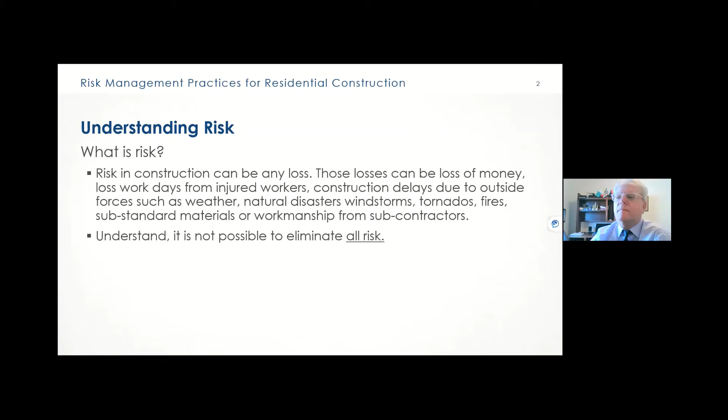So with risk comes reward. Obviously, the bigger the risk, the greater the reward. With that said, the construction manager or construction company owners must be able to understand the risk of a project in order to determine if the risk is worth the reward.

Generally, in the construction industry, in residential construction, usually the risks are a little bit less complicated than it would be like in a large commercial construction project where you have multiple floors that are being built, or you may be building on a substandard soil surface that you have to take into consideration for compaction to make sure the building doesn't settle or tilt or something of that nature. So, you know, residential construction is a little bit less complicated.

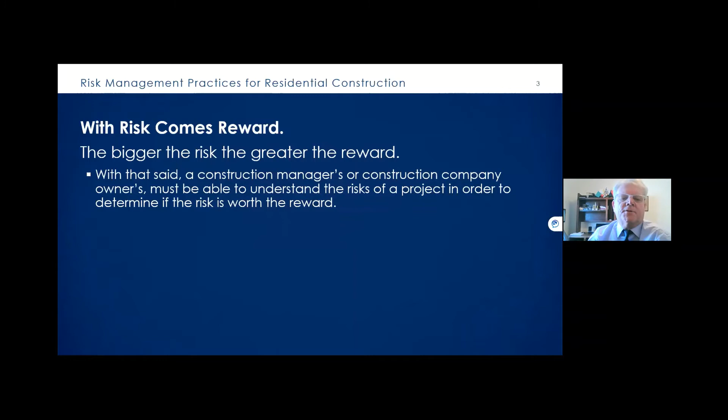The first one is identification. Obviously, you have to identify your risks in order to be able to take measures to prevent a loss. In doing so, you have to do an assessment of the risks to determine what the degree of the risk exposure is and whether or not it needs to be prioritized to be a high priority or a less priority risk to take into consideration.

You have to implement controls, which is what I do for a living. That's why they call us loss control. Those are various things like administrative controls. It could be, you know, safety equipment on a job site as a control. And these are things that we discuss with our insureds when we're on job sites talking about preventing losses on their construction sites. You certainly have to have a review process to determine whether or not the controls and your assessment have been accurate and working properly.

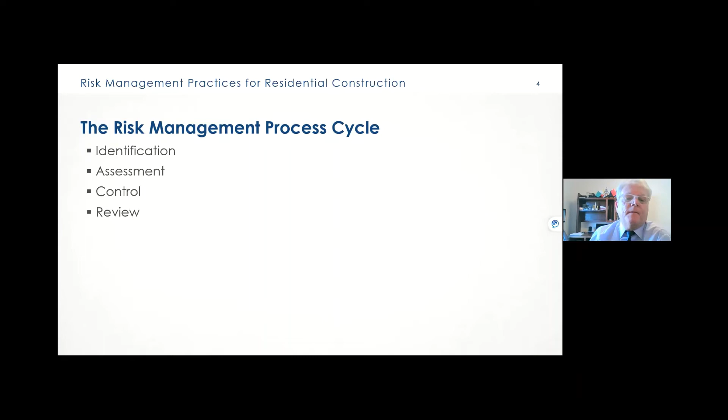And we'll get into each of these, identification first. So what are your risks? Well, as mentioned, it can be many things, such as weather. Obviously, you that are in the construction business know that weather always plays a significant factor in how your job sites progress. So we have to plan for weather events various times of the year, obviously. Certainly, if you're in the framing contracting business, wind is your enemy, and you have to make sure that you put the proper bracing in your framing so it doesn't get blown down during the process. We have a lot of losses associated with wind as well as fire, which is another big hazard associated with buildings that are under construction, especially those that are frame construction made out of wood.

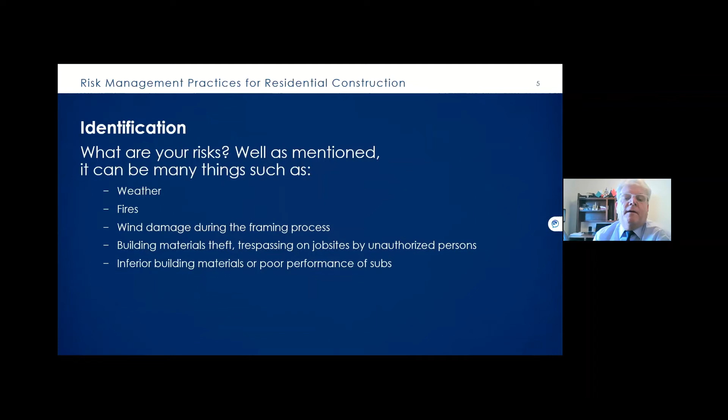Obviously, building materials. Theft is also an exposure that contractors have to be aware of. Trespassing on job sites by unauthorized persons. Certainly inferior building materials or poor performance of subs have to be identified, hopefully early on before it becomes a major problem after a structure has been built. So that is something that the general contractor or the home builder has to be aware of and monitor.

Other examples of things that in the identification process would be worker accidents resulting in serious injury or death. Certainly you need to have the proper safety measures in place and training of your employees and subcontractors that you use on your job sites.

There are regulatory exposures on jobs from the authority having jurisdiction of your building projects that you have to identify and be aware of, that you have to take into consideration. Certainly Occupational Safety and Health Administration enforcement actions resulting in expensive fines. So those are all things that have to be identified and controlled.

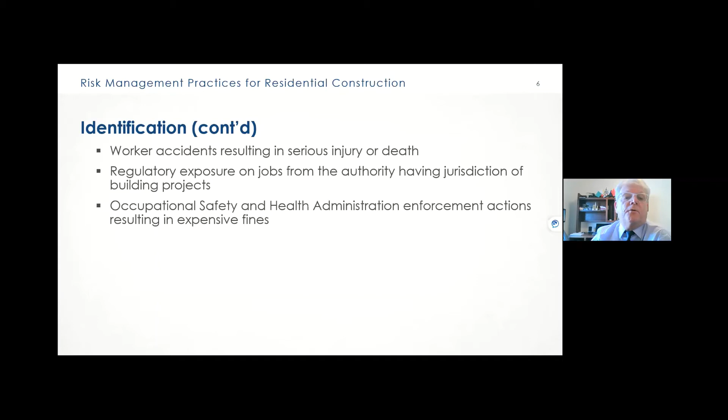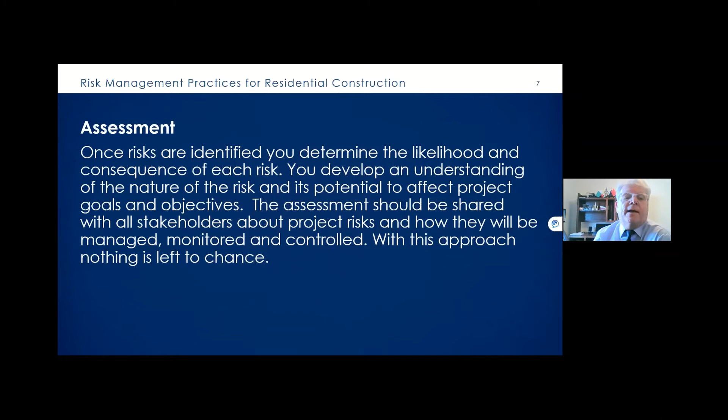During the assessment phase, once risks are identified, you determine the likelihood and consequences of each risk. You develop an understanding of the nature of the risk and its potential to affect project goals and objectives. The assessment should be shared with all stakeholders about the project risks and how they will be managed, monitored, and controlled. With this approach, you try to leave nothing left to chance.

So in the control phase of a risk management assessment or cycle, what is the impact a potential risk occurrence will have to the project, and how much will it impact your reward? Controls can be many measures taken following the assessment process to reduce the impact or eliminate the risk entirely.

Examples: implementing a subcontractor qualification process to ensure your subcontractors meet your high standards. Hiring subcontractors that have experience in the tasks that need to be performed to construct the dwelling in a safe and cost-effective manner.

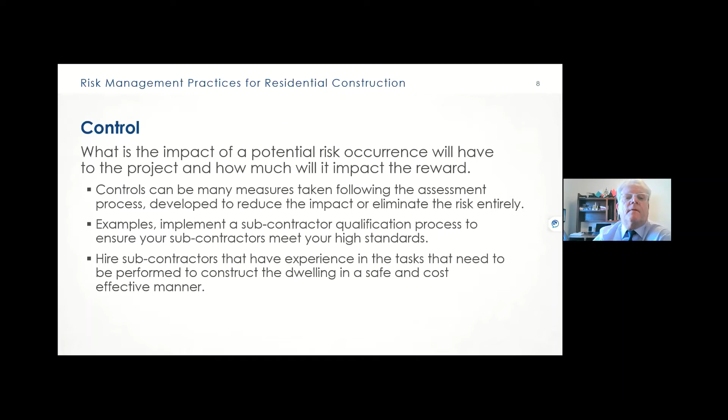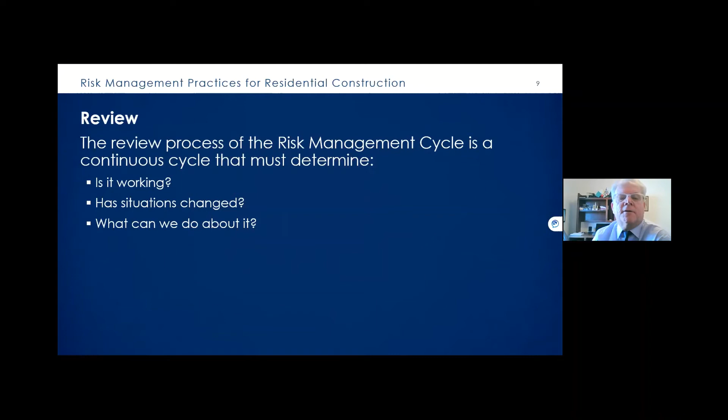During the review process of the risk management cycle, this is a continuous cycle that must be determined. You have to review and see if your controls are working. Has any situation on the job site project changed? And if so, what can we do about it? So there has to be a continuous review of your risk management cycle during a project to identify any issues that come up during a construction phase of your building.

Transfer of risk, you hear that often in the insurance industry. We have all seen construction risk transfer agreements that are asked to be signed by general contractors directed to their subs, to hold them harmless in the event of any and all claims associated with their part of the project. Now, there is a news flash, and nobody likes to have to sign these agreements, especially subcontractors, which are asked to be signed before any work begins. But don't get me wrong, they have their place as a risk management technique in transferring risk and liability.

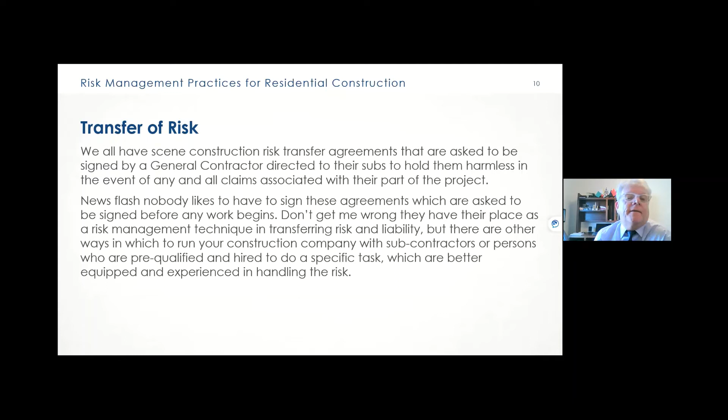But there are other ways in which to run a construction company, with subcontractors and persons who are pre-qualified and hired to do a specific task, which are better equipped and experienced in handling the risk. So that's where pre-qualification can come into play and be very effective in vetting your subcontractors to make sure they do have good safety programs, their employees are well trained, they're financially stable, and are meeting your high standards before you hire them to do a particular task on your project or building.

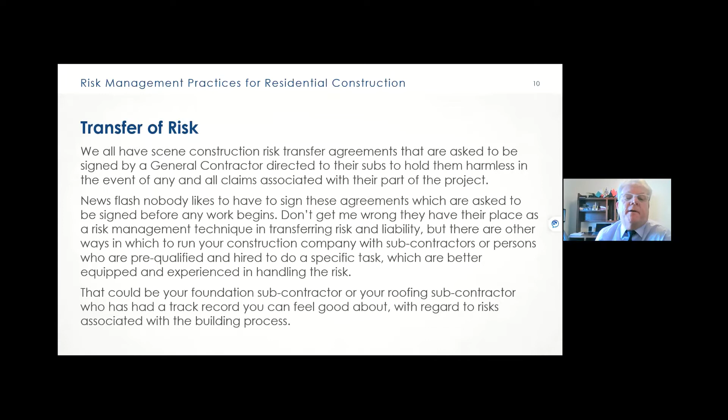That could be your foundation contractor, your roofing subcontractor, who has had a track record you can feel good about with regards to risks associated with their building process. One thing in risk management is document control, especially on complex projects.

Document control is a backbone in construction management, including construction risk management. You need to have a documentation system that will effectively improve workflow, ensure you're delivering your projects on time, and with the least amount of risk and loss.

Today, the technology must be leveraged to improve document control and control risk. This can be done with software systems that allow every stakeholder to have access to input data and documents that are critical to the flow of the project. With the reduction of the paperwork burden, you will have more time free to spend on job sites to conduct quality, productivity, and safety audits, and work on your higher level tasks to mitigate risks.

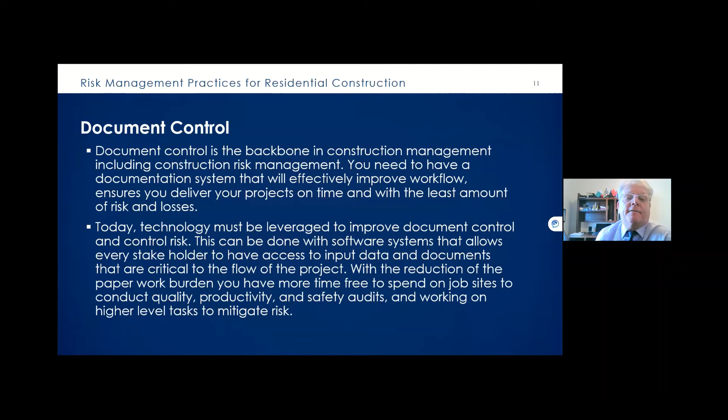One thing that we do as loss control consultants is we're very much interested in job site security, especially if we're insuring the contractor, or if we're actually underwriting the entire building project. So we take a look at job site security.

Sometimes old school is the best way to protect a job site from thieves and trespassers, in combination with new technology.

One way of doing that is putting up a fence around your job sites if feasible. Now, I know that a lot of residential construction, you don't see fencing. In my career, I have seen some home builders that do put up fencing around their projects, especially if it's in a subdivision that has people living in it. There may be children in the area, so putting up a job site security fence is a good way of keeping trespassers from coming into your job site.

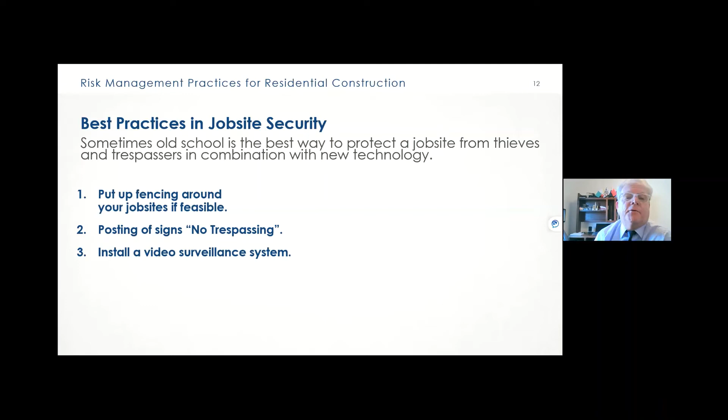Posting signs for no trespassing, installing video surveillance systems. Today there are wireless cameras that can be placed inside buildings under construction, that can be tied to a cell phone so you can monitor a job site. There are motion detectors with these surveillance systems, so if somebody walks into a job site or a building under residential construction, that would set off an alarm, sending you a message that you've got a trespasser on your job site.

The use of GPS tracking devices for equipment. We have a lot of equipment theft with construction sites. Building materials are also stolen off job sites and have high value.

Another thing that is very important is to schedule material and equipment deliveries and pickup of equipment carefully. You don't want to have material sitting on a job site for too lengthy a period of time, allowing thieves to come on site and steal that material. A lot of contractors will rent equipment, and that equipment is usually delivered by the rental company. Sometimes the rental company is not very good about picking up their equipment in a timely fashion, and it can be left on a job site for a lengthy period of time, allowing thieves to come in and steal the equipment. So it's very important to make sure that you've got a delivery schedule.

Again, as quickly as possible during the construction phase, the framing phase of a residential home, you want to try to button up that home as best you can, maybe with plywood. You want to put maybe some 2x4s over the windows to prevent trespassers from entering the building, those kind of things.

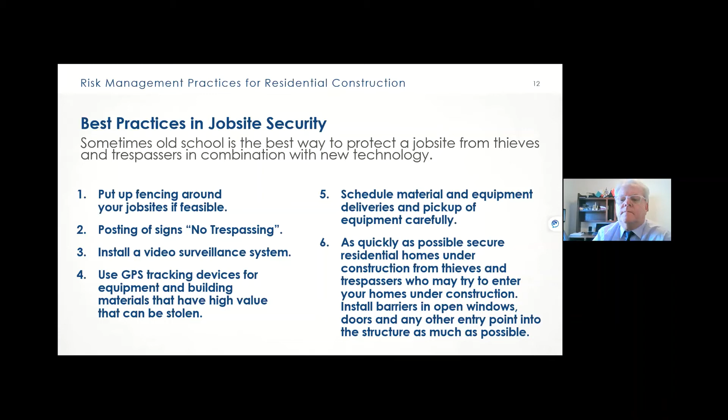I mentioned earlier about pre-qualification for subcontractors. For a building owner, construction company, general contractor, or a homeowner construction company, you need to have a good pre-qualification program for your subcontractors. What specifically has your program accomplished? What factors should you consider in managing your pre-qualification programs?

Most residential home builders specify expertise for the tasks that they are hiring subcontractors for, whether it be a framing contractor, foundation, electrical, or roofing contractor. They need to take a look at their safety programs. Do they have a good track record as far as accidents are concerned? There are a lot of factors that you can take a look at in doing a pre-qualification of your subcontractors.

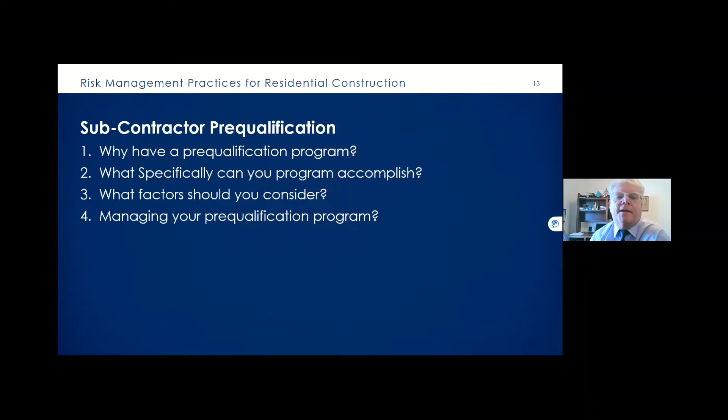One thing that I wanted to cover today in my presentation is fall protection. This is a standard that often gets abused, and contractors don't always follow the letter of the law as far as fall protection is concerned.

Fall protection is covered under 1926-501. The agency's interpretation of residential construction for purposes of the 1926-501 standard combines two elements, both of which must be satisfied for a project to fall under that provision. The end use of the structure being built must be a home, a dwelling, and the structure being built must be constructed using traditional wood frame construction materials and methods. The limited use of structural steel in a predominantly wood framed home, such as a steel I-beam to help support wood framing, does not disqualify the structure from being considered residential construction.

Traditional wood frame construction materials and methods will be characterized by the following: framing materials of wood or equivalent cold form sheet metal stud framing, not steel or concrete, with wooden floor joists and roof structures; exterior wall structures such as wood or equivalent cold form sheet metal stud framing, or masonry, brick, or block. For methods, traditional wood frame construction techniques must be employed.

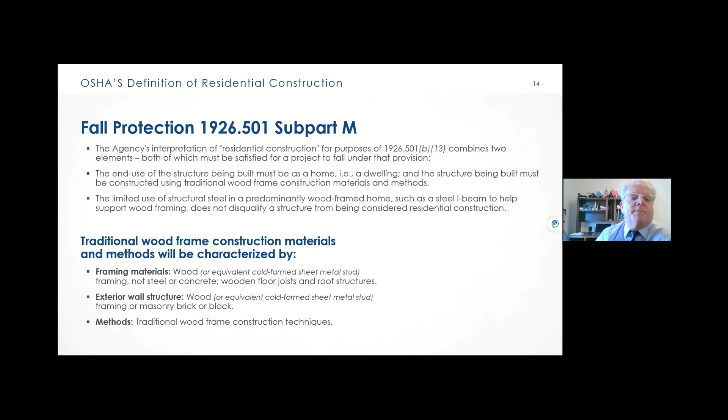So the residential construction fall protection requirements: employees working 6 feet or more above lower levels must be protected by conventional fall protection methods, such as guardrail systems, safety nets, or a personal fall arrest system, commonly called a PFAS system, or an alternative fall protection measure allowed by the provisions of 1926-501 for particular types of work.

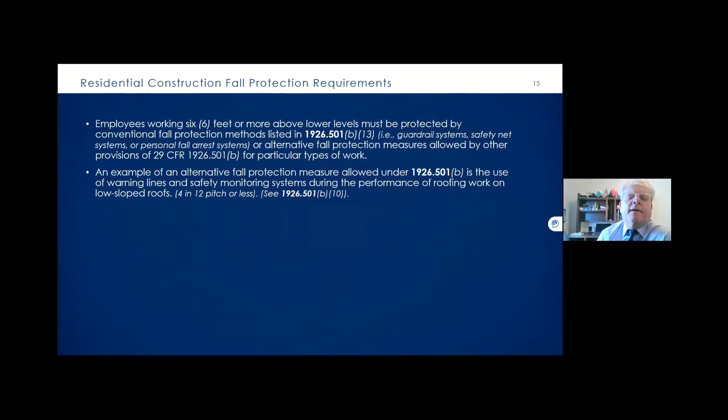An example of an alternative fall protection measure allowed under 1926-501 is the use of warning lines and safety monitoring systems during the performance of roofing work on low slope roofs. Commonly you will see ropes with flags on the top of a roof, indicating a leading edge. So the workers have to stay inside that rope line and cannot get on the other side of that rope line without having proper fall protection on.

OSHA allows the use of an effective fall restraint system in lieu of a personal fall arrest system. To be effective, a fall restraint system must be rigged to prevent a worker from reaching a fall hazard and falling over the edge. A fall restraint system may consist of a full body harness connected to an anchor point at the center of a roof by a lanyard of a length that will not allow a worker to physically reach the edge of the roof.

There's a lot of different devices out there today. We've come a long way in fall protection over the years. There are various ways of putting in anchorage points in residential buildings as they're being constructed. I've seen them use nylon connection devices that are actually nailed into the eaves of a house as it's being built, allowing the roofers to be able to attach their lanyards. That's one method.

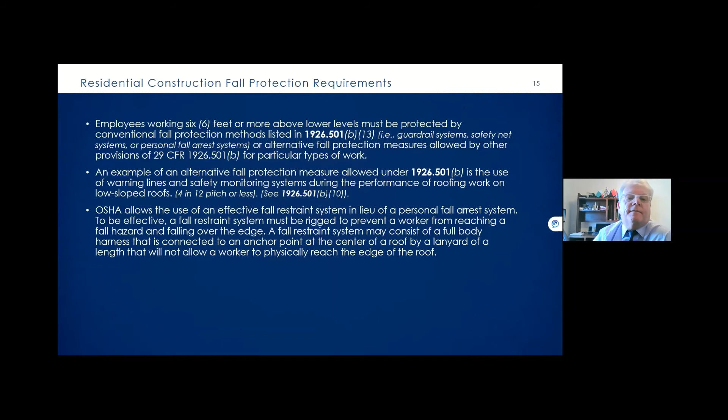When the employer can demonstrate that it is infeasible or creates a greater hazard to use a required fall protection system, a qualified person must develop a written site-specific fall protection plan in accordance with 1926-502K. That, among other things, specifies the alternative fall protection methods that will be used to protect workers from falls.

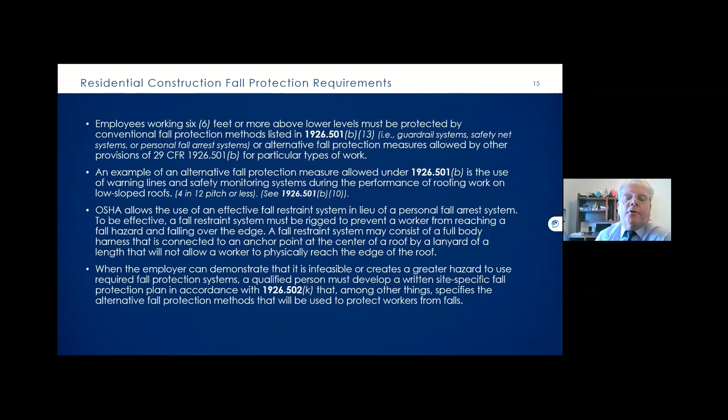Employers must follow 1926-501, which states that workers engaged in residential construction, as I said earlier, 6 feet or more above lower levels shall be protected by a guardrail system, safety net system, or a personal fall arrest system, or by an alternative fall protection measure allowed under 1926-501 for a particular type of work that's being done.

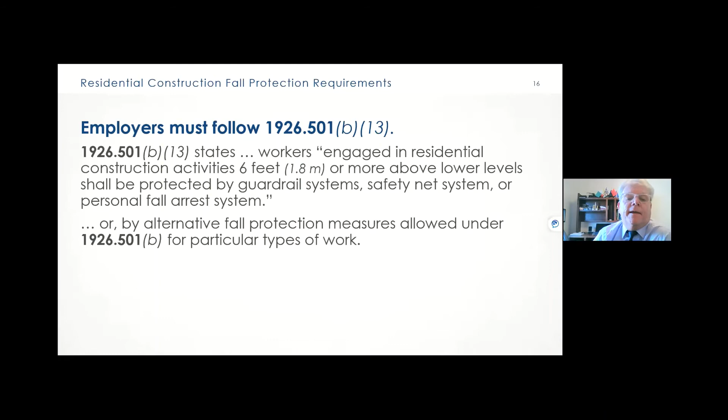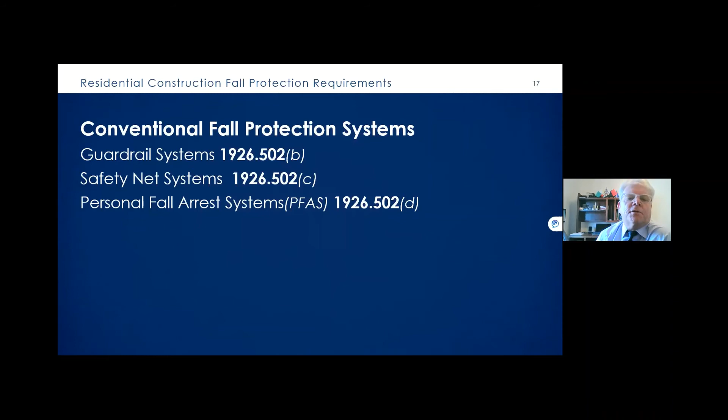Conventional fall protection systems often employed during construction of residential buildings are guardrail systems, and sometimes safety net systems—though you don't see too much of safety net systems used on residential. I think you would probably see that more in a high-rise situation than in residential construction. Personal fall arrest systems, that would be your body harness and lanyards attached to an anchorage point, are often used on residential building construction.

The requirements for guardrail systems include top rails 42 inches plus or minus 3 inches. The top rail must withstand 200 pounds of force—that's basically an average man's weight for that top rail. Mid rails, halfway up, have to have 150 pounds of strength, along with the surface of the guardrail must be smooth or covered to prevent lacerations or snagging of clothing. You're not allowed to use any kind of steel or plastic banding according to the standard.

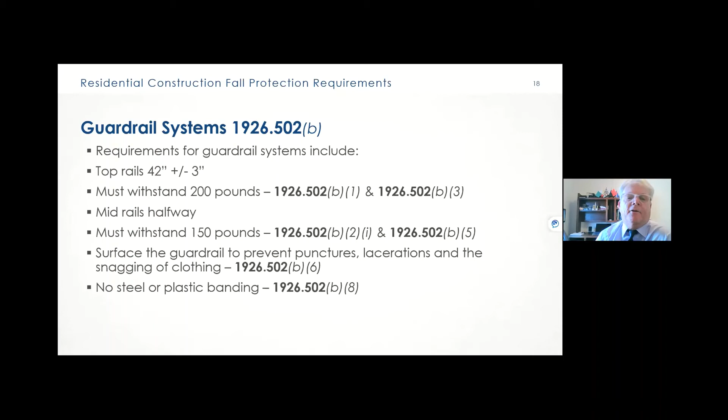Safety net system requirements: as close as practicable, no more than 30 feet below, meaning you can't fall any farther than 30 feet—that's the top amount allowed under the standard. Sufficient clearance to prevent contact with surfaces or structures below, and the net has to be drop tested or certified for a fall arrest system.

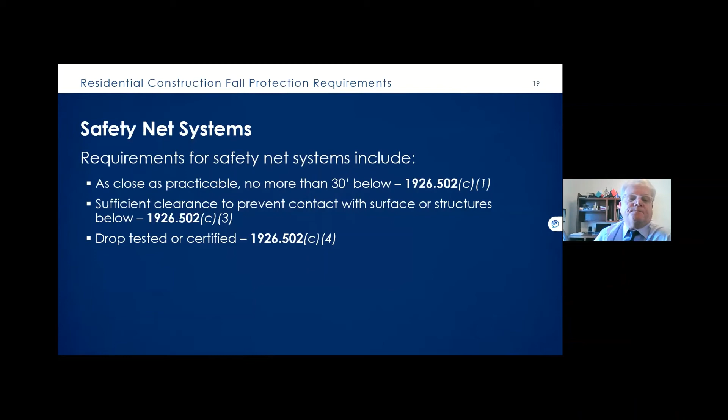A PFAS must include the following: anchorage point, body harness, connector lanyard. A PFAS must also include a lanyard and a deceleration device or lifeline. For those of you that don't know what a deceleration device is, it's basically a clutch system in line with the lifeline that allows a person to fall a few feet before the clutch engages and stops the fall from happening while it's in progress.

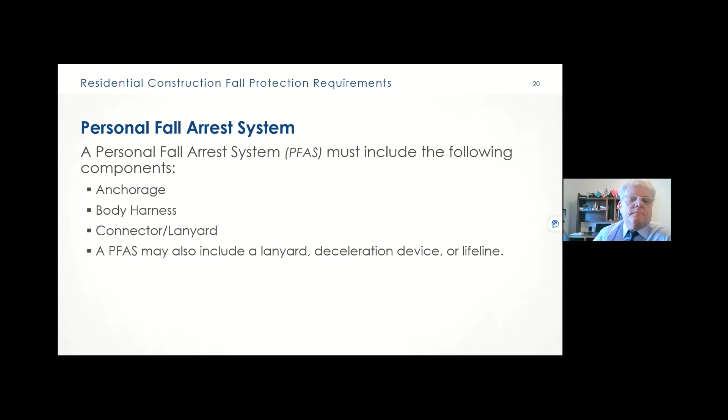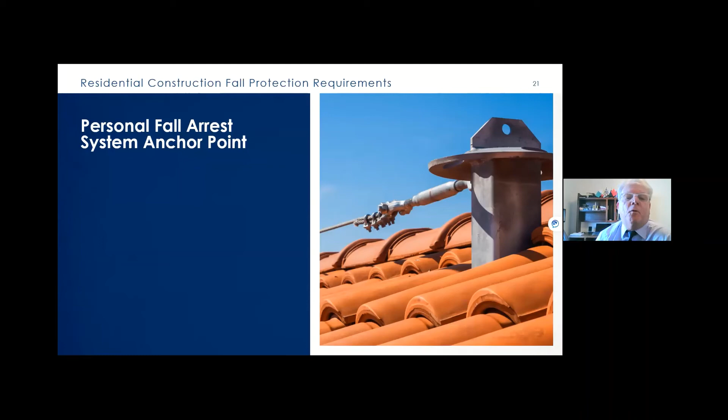Anchorage used for attachment is critical to the success of your fall protection system. It has to have 5,000 pounds of strength to it, which sounds like a lot—which it is—to be used for an anchorage point. There needs to be a competent person qualified on the job site that understands how to properly install these anchorage points, following the employer's and manufacturer's instructions and recommendations, or a registered professional engineer, for proper installation.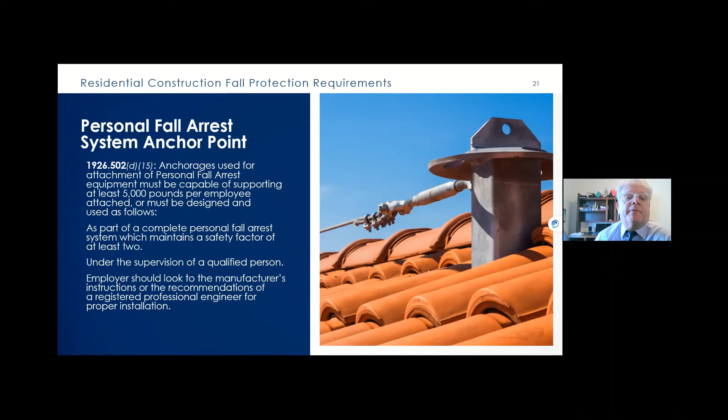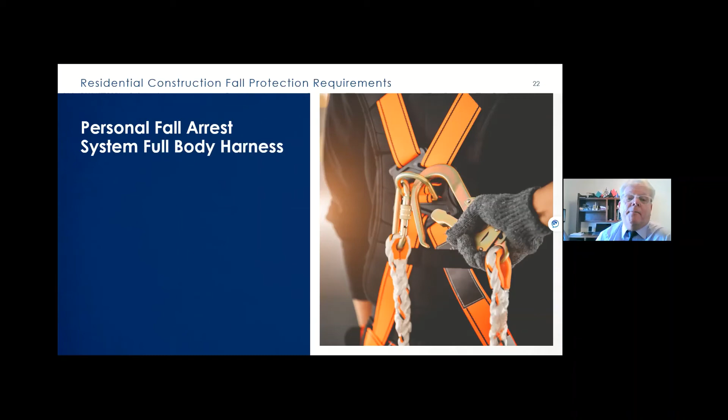Hey Jim, when you're looking at loss control for falls, I was talking to an assistant fire chief, and he said they get called most of the time because of falls. What would you say is the biggest violation you see when doing loss control on a job, something they could have done differently to prevent that fall? What's the most common thing you see?

Well, funny you mention that. I've got some examples here in my presentation, but I'd say a lot of times it's lack of installing railing, especially on second floor levels, and during the framing process, open floor holes for stairwells in residential or multi-floor buildings under construction. There's no railing around that to prevent a worker from backing off and falling to the level below. That's probably the most common thing I see. Or you just see blatant total non-use of any fall protection on some job sites. Unfortunately, there are still contractors out there who think they can build residential buildings without fall protection measures. So it runs the gamut.

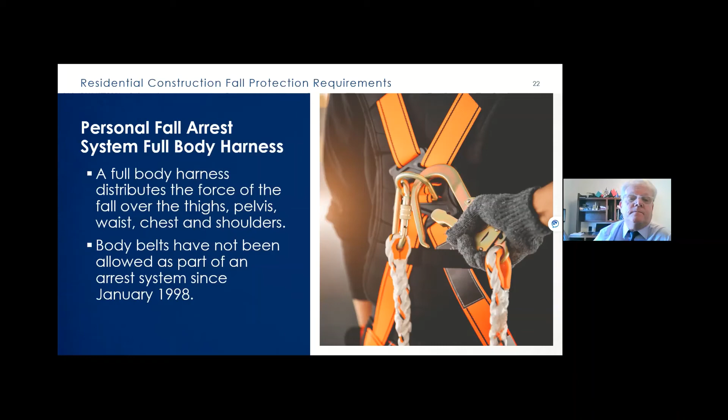I think you have a device where you can raise your hand. I want to see how many people think this is a fall hazard. There's a little button there, you can raise your hand.

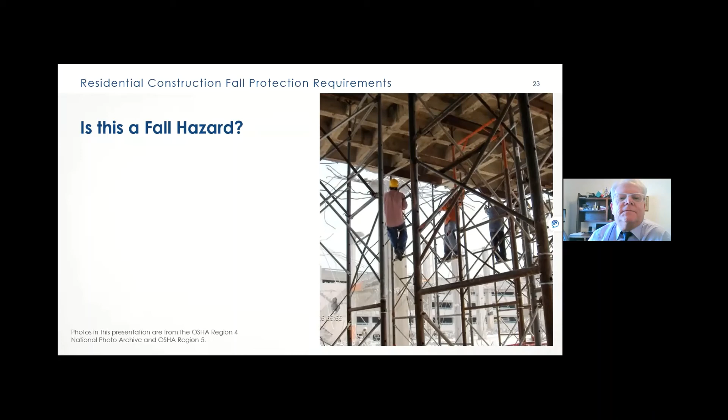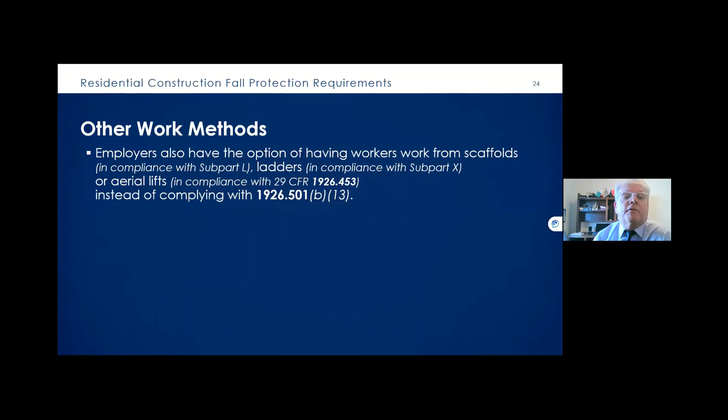As I mentioned earlier, employers also have the option of having workers work from scaffolds, ladders, or aerial lifts. All of these are considered alternative work methods. But the answer to this scenario is yes, this is a fall hazard. You've got a guy setting up a scaffold with no fall protection on. The standard says you have to use ladders or aerial lifts to erect scaffolding safely in order to be in compliance with the 1926.501 fall protection standard. Workers can fall from climbing on a shoring structure to set it up and remove it. As I said, ladders and lifts must be provided.

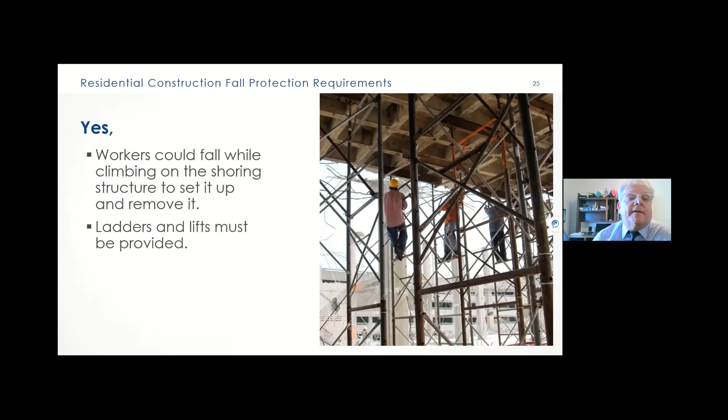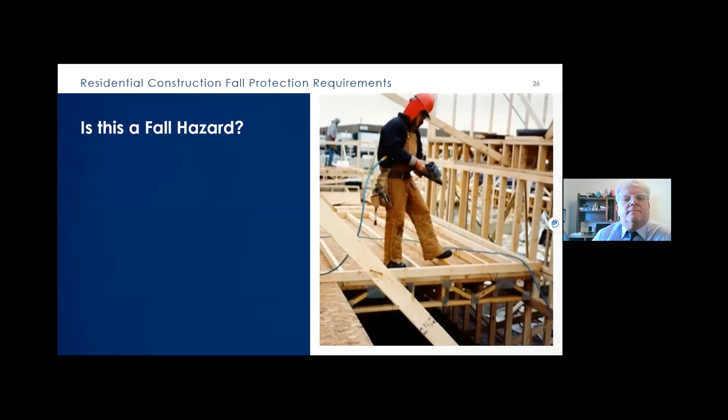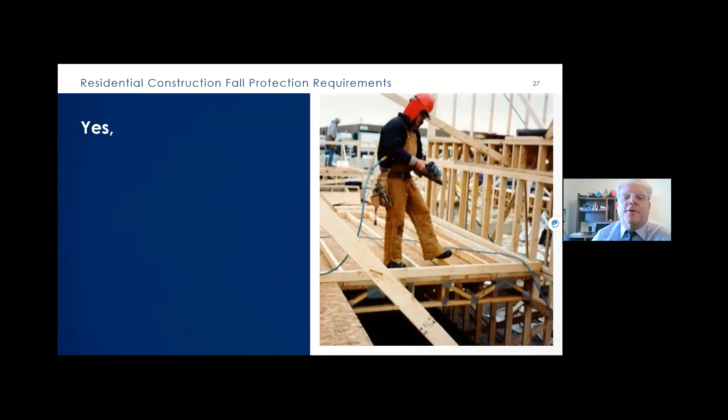Is this a fall hazard? For sure. The answer is yes. This is a situation where you've got an open-sided opening on an upper level where a worker is working. He has no fall protection on. He's exposed to a fall greater than 6 feet while working near stairwell openings.

This is a common hazard we see on building sites under construction. Also sometimes they cut holes in floors for HVAC that has to come up through a floor. You'll see holes in a floor deck that aren't covered. Many times there have been accidents involving contractors falling through those kinds of holes. Those have to be covered. A lot of times they'll cover them with inch-thick sheeting plywood, and then sometimes they'll spray paint the word 'hole' on it to alert employees or workers that there's a fall hazard there.

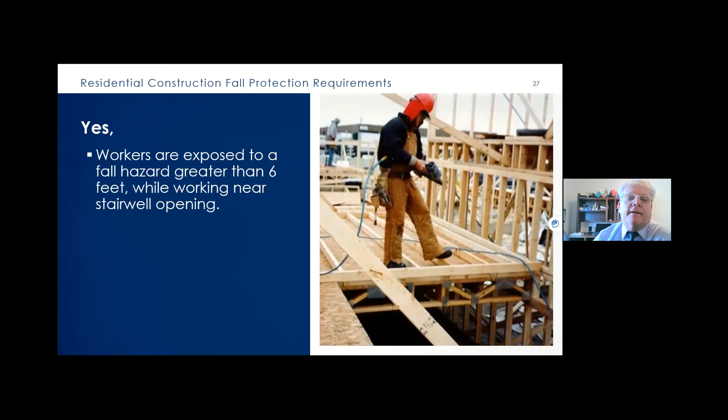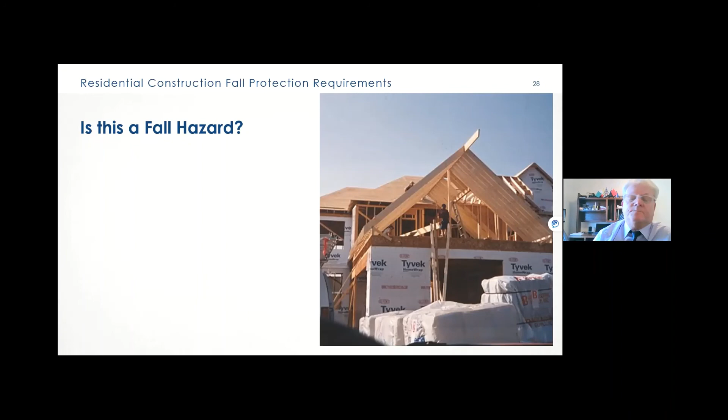Here's a situation where a residential home is being built. You've got a worker working on the upper level, probably over a garage area, I'm not sure. But anyway, there's no guard railing on that particular project. This is obviously higher than 6 feet. A guardrail system, safety net system, or personal fall arrest system is required for that worker to be in compliance with the fall protection standard.

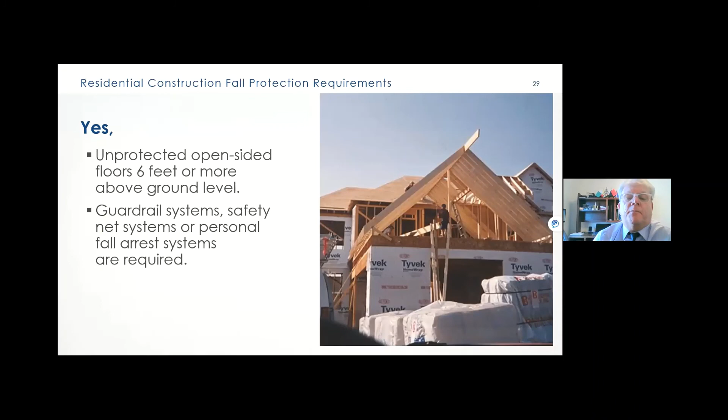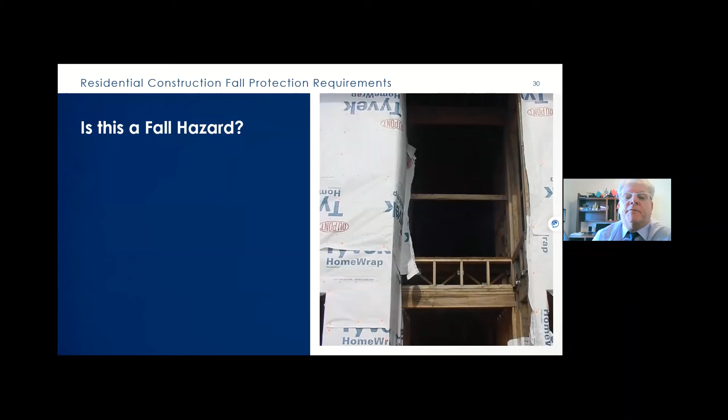So, to answer the question, yes, this is a fall hazard. The photo shows a mid-rail and a toe board are missing on an open-sided floor of a building. This could result in a fall of approximately 12 feet in this scenario. As I said, toe boards are required. A toe board is basically a 2x4 that is nailed to the floor and positioned on its edge.

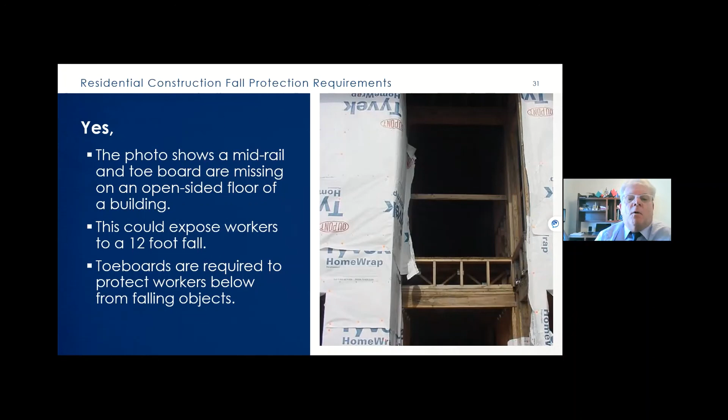That keeps any materials or anything being kicked off from that floor level down to the bottom floor level where there may be workers working underneath that could get hit in the head. So that's why toe boards are required in any guardrail system.

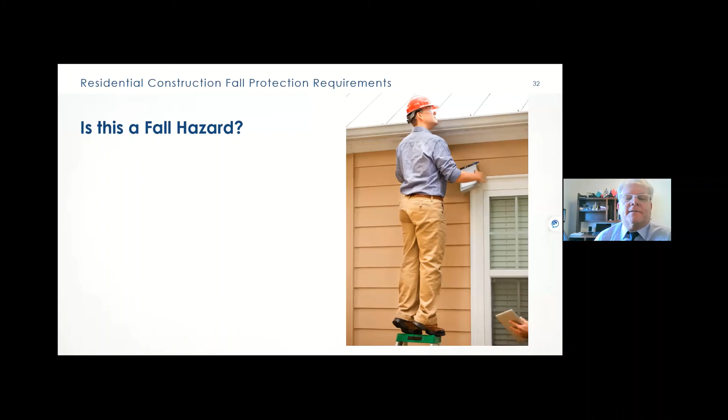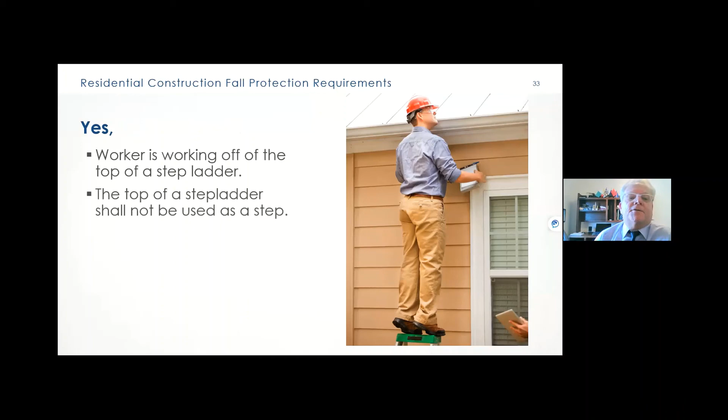We've all seen this unsafe act by workers on job sites, and maybe we do it at home too, I don't know, but standing on top of the top step on a ladder like this is not permitted. This is a fall hazard. The worker is working off the top of the step ladder, which should never be used as a step.

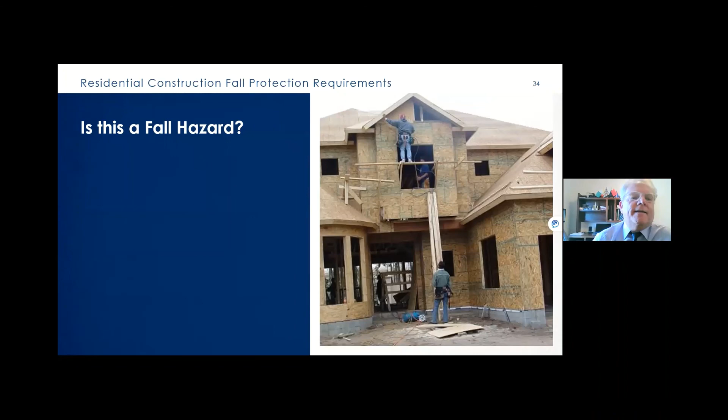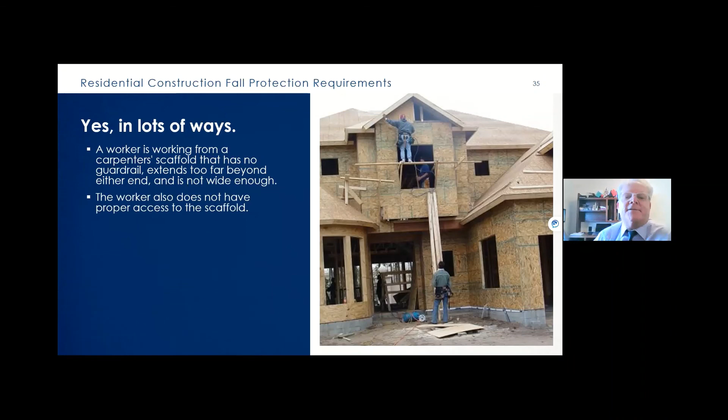This one is an interesting photo. This is basically a scaffold, and it has a lot of hazards associated with it. A worker is working from a carpenter scaffold that has no guardrail, extends too far beyond either end, and is not wide enough. You can't tell whether that board he's standing on is even a plank board, what we call it in the safety industry. A plank board is a certified board used in scaffolding that's been tested for strength. A lot of times contractors use just any kind of lumber to fashion a plank board on a scaffold. The worker also does not have proper access to the scaffold. I have no idea how this guy got up there the way he did without falling. It's amazing. Not only that, he presents a hazard to the guy working below him as well, from falling, or from any tools that he might drop.

Also another fall hazard in this picture, you see a guy standing there in the window. There's no guardrail across that window. Under construction, until windows go in, you are required to have a railing across those windows to prevent somebody from falling out of them. So that's something we look at when we're on job sites doing inspections.

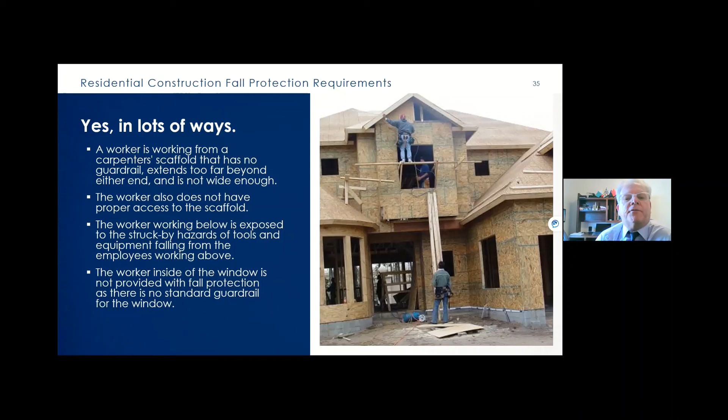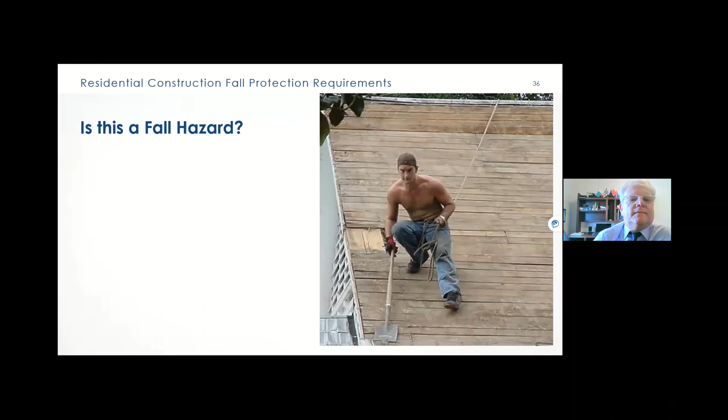Is this a fall hazard? The answer is yes. This worker is working on an 8-12 pitch roof with only a lifeline tied to his waist as fall protection. That's illegal. That's not a fall protection system that meets the standards of the OSHA standard on fall protection. You're required to have a full body harness anchored to an anchorage point that's 5,000 pounds tested. So the employer should provide fall protection equipment for his workers. This looks like a roofing contractor that's peeling off a roof on a building.

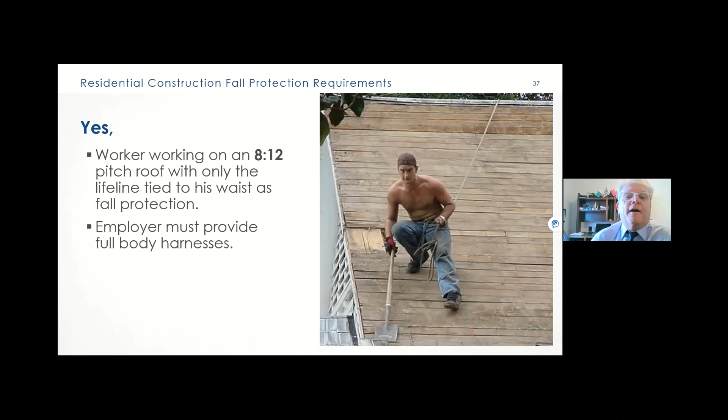Hey Jim, sorry to interrupt, but we've got a few more minutes and then we're going to have to wrap it up, so I just wanted to give you a little warning there.

Okay, this is my last slide, actually. Perfect.

One thing I wanted to cover quickly is something maybe you're not aware of: the multi-employer citation policy for OSHA. Under this policy, more than one employer can be cited for a hazardous condition that violates an OSHA standard. An employer that exposes one of his employees to the hazards created by an unsafe condition may be subject to an OSHA citation. In situations where an employer's own employees are not exposed to a hazard, that employer may still be subject to OSHA coverage if they qualify as a creating, correcting, or controlling employer. So if you're a general contractor directing your subcontractors on a job site, you can be cited along with a subcontractor that has a safety violation. There's a two-step process used to determine whether more than one employer may be cited for a hazardous condition. So if you're a home building company acting as the general contractor, you do have some exposure under this multi-employer citation policy, possibly from the acts or unsafe conditions of your contractors on the project.